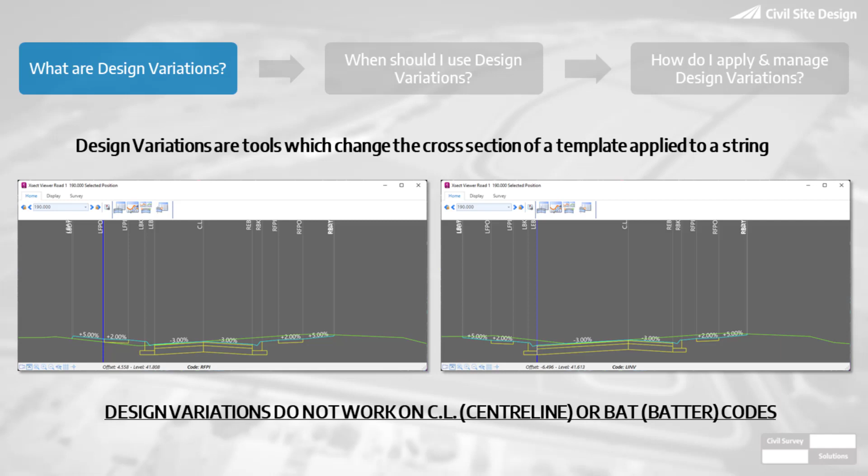Do not use variations to try and control the centerline or the BAT codes on your template. I think it's a fair summary, Todd. Yep, very much so. There's special codes that are not controlled by the variation controls at all. We will mention the design data form will flag where you can do the batter, and the centerline is the vertical grading editor at the end of the day. So that's where you control those particular codes. So we'll be looking at everything other than those two.

Now, really, the question is, when should you use design variations? And look, there's no kind of right or wrong way of answering this. There is a very wrong way when we look at point 2 in here, and we have an answer for that. In fact, there's a webinar which I'll mention shortly. But certainly, there is nothing wrong with applying multiple templates, but it's this element, isn't it? The time consumption for creating and applying. There's multiple ways to achieve the same thing.

And I suppose one of the big ones is the transitions. Transitions between templates are linear. So when you're transitioning between a template, you're basically going from a point to a point. There's no accounting of any curvature that is going on between those 2 points or between those 2 chainages. So changing templates works for some instances, but not for all. If you want to have finesse on control, then variations is the key.

Absolutely. Finesse and control is something we're going to talk about here, but certainly if you're wanting to move a code that happens to match onto a feature, for example an alignment, you're doing some widening, or you need to make some physical changes to really change the shape where you're not putting a code 90 degrees to the template, then variations are going to suit your requirements. The great thing is also they respect the subgrade. Todd, this is something you're going to be covering. Yes, I'll look at that a couple of times in my examples. Fantastic. And adding a code into your template which wasn't there originally does have implications on subgrade, so we're going to be covering that.

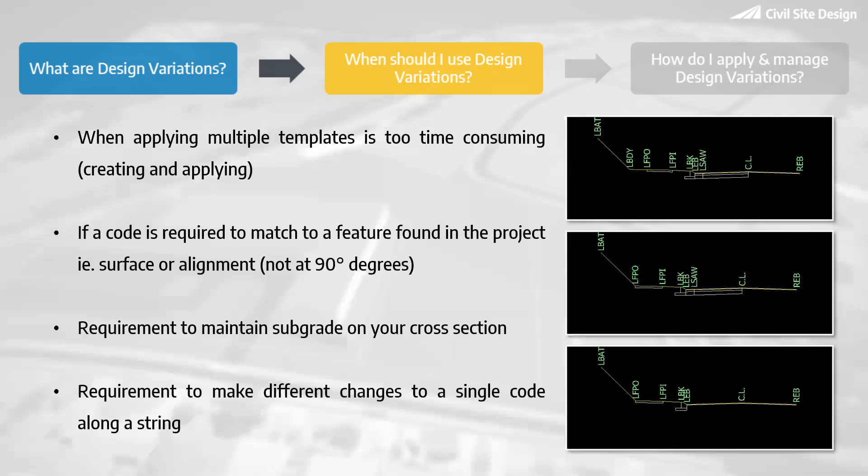Now, the complete polar opposite of this webinar is this webinar. So when should I not use design variations is this webinar. And a lot of the content, Todd, you're going to be doing copy codes, which looks at putting a footpath in at the back of our proposed road or existing road. Yes, Ilett Street, where the parking facility is. That's right, where the parking is. We actually did the parking, which you do not use design variations for.

We used a Civil 3D alignment, and people go ahead and try using match to alignment for that. Completely the wrong method. This webinar is the polar opposite, but it'll complement. It shows you why you would not use variations and templates and actually use independent strings associating with each other and then using Model Builder to maintain the connection. So well worth having a look. It's on the Civil Site Design YouTube channel under the webinar playlist.

And I think I've moved it, so it's actually the second from first one that we've done a year ago. Really? Can you look at the date on that? I can't believe it's a year ago already. We did this one. So yeah, time's flying.

Then the last point is, well, how do I apply and manage design variations? And certainly for those of us that have been using the software for a long time, and Todd, I mean, you've been using this software.

I don't really want to admit that, but yeah. All right. Well, you can come out and talk about it. You're in a safe place. No, I have been using the software for a very long time.

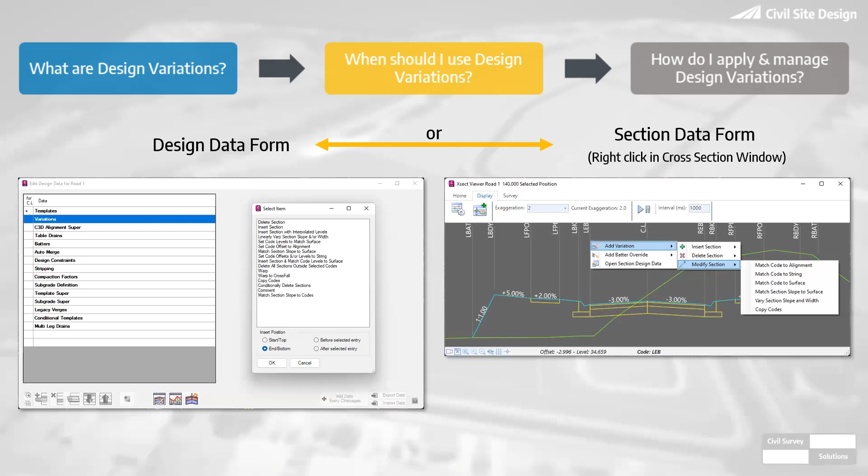Look, we're just plugging some points here about why you might use the design data form, as opposed to, or in addition to, the section data form. And really, the key one is this: the design data form contains every single design variation. Okay, there are a few missing, as we'll see shortly. We've got a little table.

Comments, which I know, Todd, you're a keen advocate. I am. And so am I, but certainly you're a keen advocate. Todd showed me a job yesterday where there were tens and tens of variations in the same string. Probably about 200. 200 variations. And comments were there to indent and categorize them, which was very helpful.

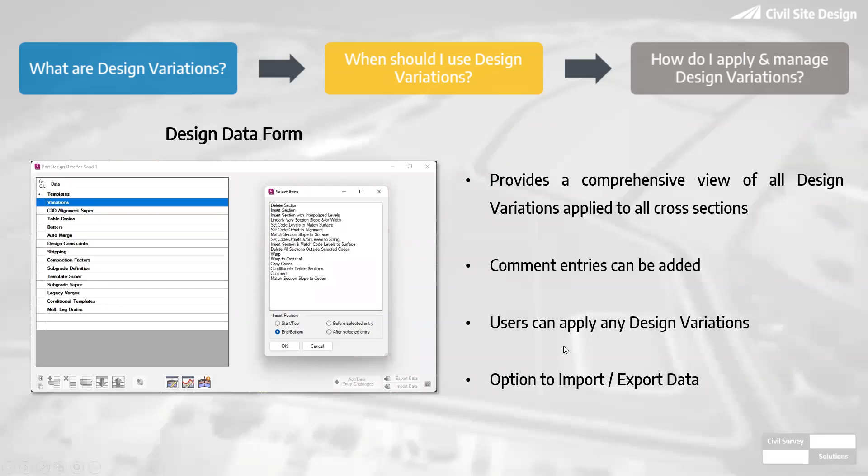Yep. You can apply any design variation through this form, and you've got the option, which you don't have in the section data, to actually export and import. And we'll show you how to use the export and import. It is actually exporting everything in this form, but it's a useful way of showing you different types of variations being applied to one string. So we can go ahead and do something, save it, and then import an alternative version to get the benefit of seeing what the other way around is.

The section data form, which you'll see how to access in a moment, you're probably seeing it through the right click in the cross-section window, provides a view of design variations, templates, and batter overrides, but only at that cross-section that you're looking at. Okay, so this does not give you the complete list, but it does give you a snapshot at that one particular cross-section. It's filtered too, which is one of the really cool advantages. Yeah, it's not everything. It's only what's relevant to this section. Absolutely, which is really nice.

And you'll see as I scroll through the cross-section window with this form open, it'll actually adapt and change this particular chainage up here for me, which is nice. So I get to see what's going on as I'm scrolling through my cross-sections. There are some benefits to using this from a speed perspective, that when you right-click over a code and decide to apply a variation of some sort over that particular code, a lot of the cells auto-populate, including the code and the chainage, which is handy.

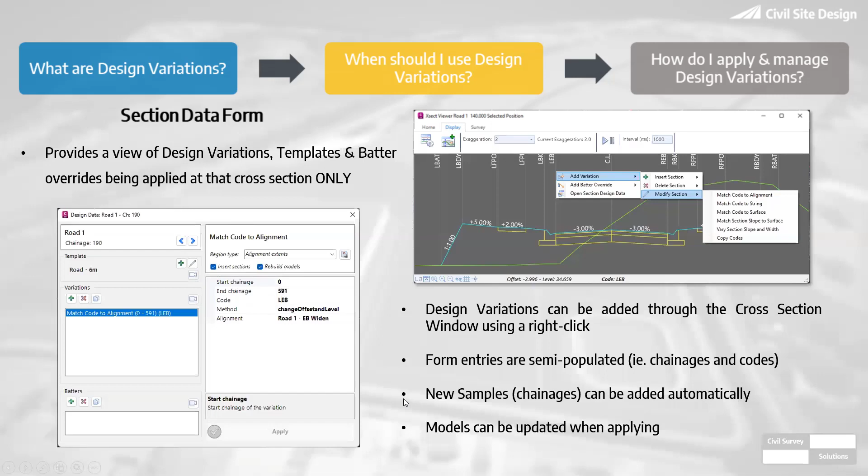New samples, which Todd's going to mention, about how to add extra samples, the trick with adding data entry chainages on the design data form. This will actually go and add these for you. So I could punch in any chainage I want. As long as that box is checked, the extra samples will get added, and models can be updated immediately. So traditionally on the design data form, we have to click on update.

So, a few benefits you'll get to see in action. One of the key ones for me, as I'm beginning to get used to using them, is that you can access both of these tools via what's known as a grip.

So when you select Civil Site Design line work in V22 onwards, I think that's right Todd, never know the exact number, one of the variants, you can hover over a grip and access things like the design data form.

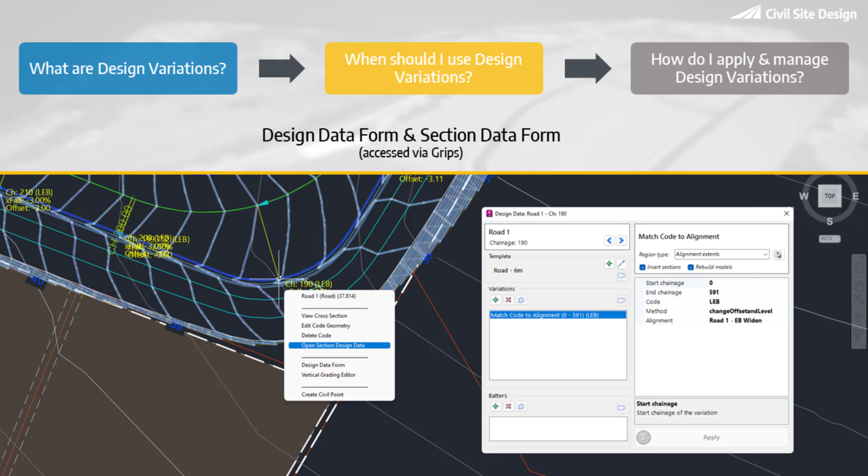Whoa, easy. And you can also access the section data form, which is this form. So I can go in, see what's happening, and apply variations, templates or batter overrides at that cross-section immediately without opening up the VGE, the design data form, or the cross-section window. Although you can open up a cross-section window, which is what we're going to try and do to give you context. So very helpful having the grips.

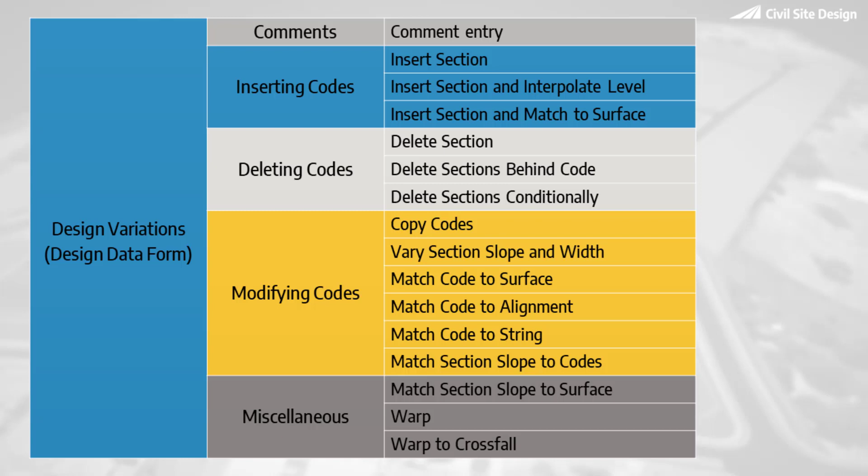The reason why we're showing you this is because there is a slight difference between what the section data form can do and what the design data form can do. The section data, the right click form, does not have these options available. That will change - we're actually discussing putting them in, but the initial instance of creating this technology was that we just add in some key variations that people want, and I think long term they'll all go in, which will be handy.

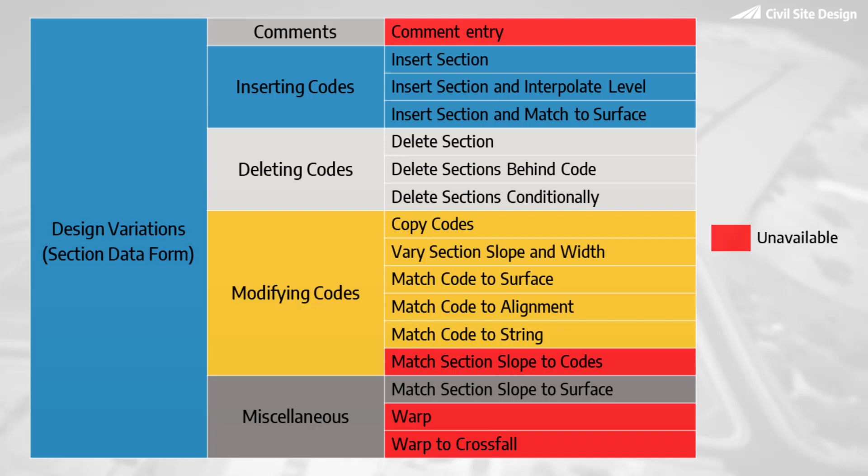There is one other thing. When you use the right click, because it was intended to be sort of new user territory, we renamed them. So what you may find is that there are differences in names and terminology. For example, where we've got match code to surface for the section data form, when we right click, we'll actually see that in the design data form this is set code levels to match surface. So we're giving you the alternate names.

I'd recommend you take a screenshot of this so you get used to it. I think most of them are self-explanatory. In actual fact, in the section data form they were intended to be a lot clearer as to what exactly they did. But for those who've used the software for a long time and want to convert or start using some of the right click or section data, this is where you'll need to have a look first. So without further ado, I'm going to hand over to you, Todd.

So I'm going to let you share your screen. I'm hoping you can just simply go share and override. If not, I'll stop sharing. Fingers crossed I set that up. Let's see if I can. I'm just moving things out of the way so you don't see the screen back itself. Yes, I'm going to stop and share that one.

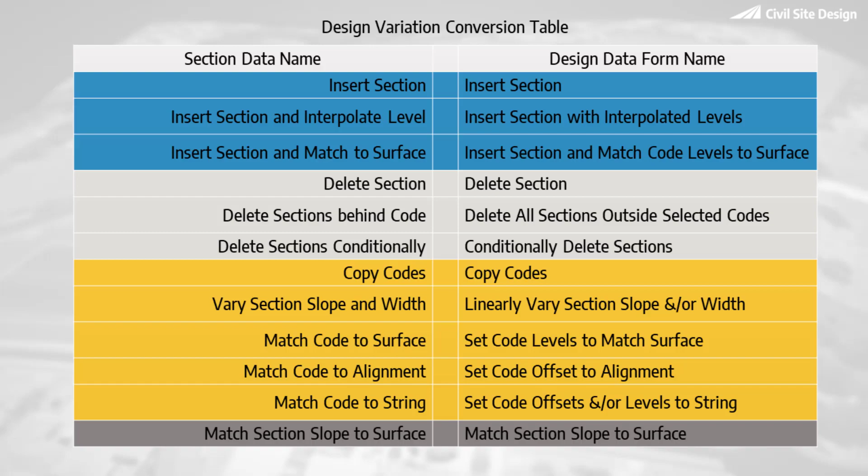Okay, fingers crossed, can everyone see my Civil 3D? With our favourite Mollywalk project? Yes, beautiful. All right, thank you for that fantastic summary. And I can't reiterate that last slide with the table of name changes enough, because it can get messy if you forget the name in one and look at the other. Anyway, ultimate goal, fingers crossed, is that we can get the development team to align the names and then there's no problem with it. But that table is key for the moment.

All right, so I'm going to show you guys the first few - basic insert, delete, and then one I actually like a lot, copy codes, which really is more about merging things together. I must admit I've manufactured this drawing to allow me to do all of these things in one spot, so hopefully I don't have to chop and change drawings. I'm just going to go to different parts of this model and show you some of the things I'm going to have a look at.

As we mentioned, you can certainly launch the design data form, which is what my focus in terms of interface is going to be, from a heap of different locations. So you can launch it directly from here, from the ribbon, and then select the code you want, the string you want to access information from.

You can launch it from within the vertical grading editor. You can launch it from the cross-section window. You can even launch it from the grips, which is actually some of my favorites.

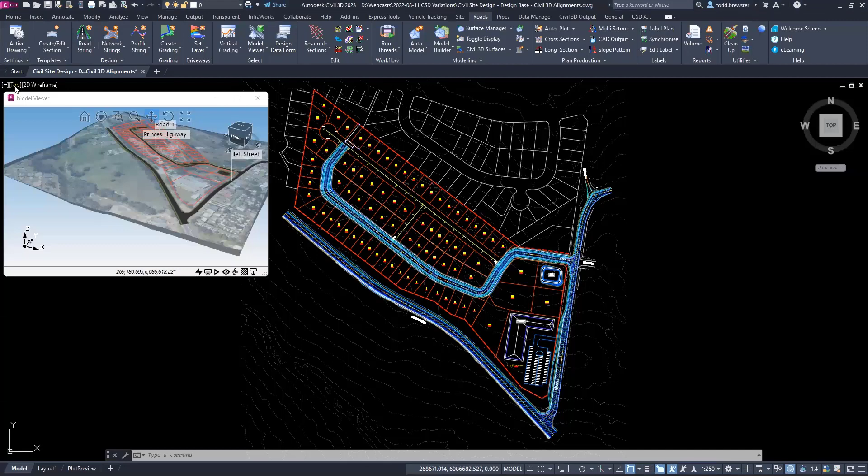So the first one I'm looking at is going to be this. I come in here, I can just simply go straight to grabbing one of the grips. There's the section data, which is the filtered one, coming from the cross-section view, and the design data form's there. So you can launch these things from lots of different places. You can even launch them from the model viewer itself.

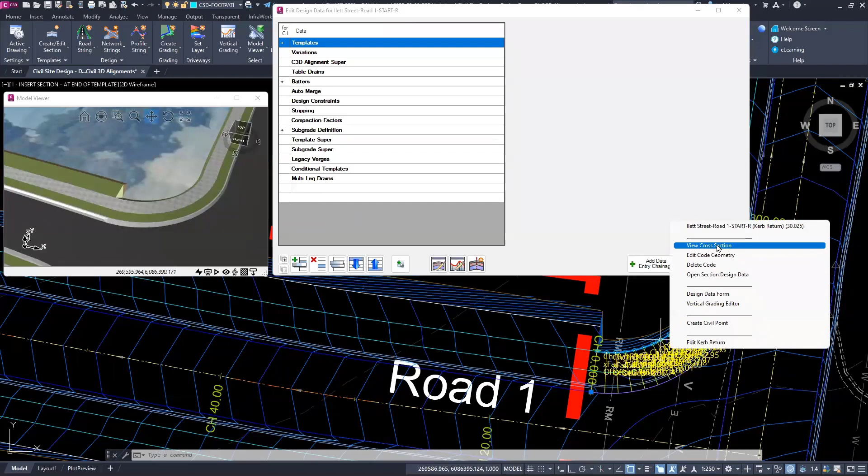So the first thing we're going to look at is this kerb return here at the intersection, and I right-click in here to get a whole heap of different commands, and I can pull up the design data form from there as well. So yeah, lots of ways to access it, and there's probably more that I haven't even mentioned, but they're the main ones. You can also launch cross-section views from the grips, so I'm going to use that a lot in this session. Just to be consistent, that's how I'm going to launch everything.

The first variation I want to look at is insert, but before I get to that, I just want to give you a real quick rundown of what some of these buttons are across the bottom that you may or may not be familiar with or used to using.

Number one, these two here on the left actually are expanding and contracting all of the entries. So as you add information to the different heading groups here, you can expand them. You can click on the pluses to do individuals, but you can use these to just globally expand everything.

These ones here are all about whichever entry you're looking at: adding new ones, deleting currently selected ones, copying them, reordering them up and down.

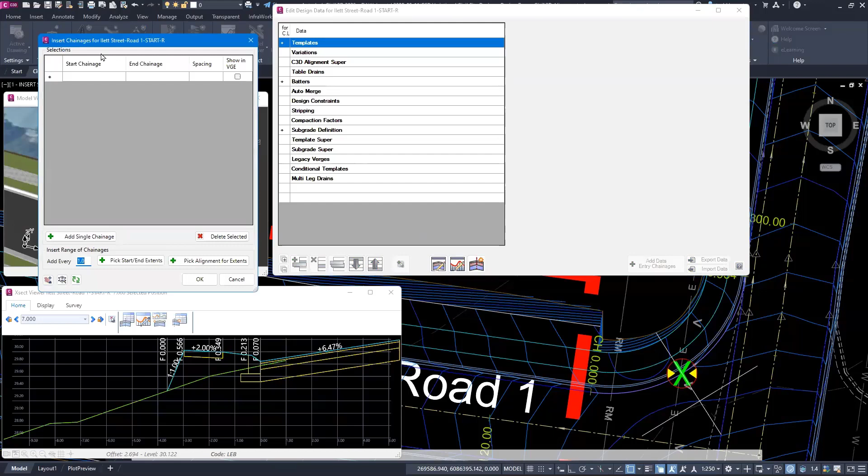This one is, to be honest, the best way to insert sections when you need them, which if you launch this one, will launch up into your selected sections list and you can start adding extra things in that you might want to use. This one is about showing cross sections.

This one is opening up the VGE. This one is the template editor. There are a few others that will appear here depending on what action you're doing, and then there'll be one that appears here, if I remember correctly, that's the one to show you the extent, cross-section, beginning and end stuff. But as they happen, I'll launch them up and show you guys what they do.

This one here, add extra data entry chainages, is probably one of the big mysteries in this form. I will show you how this works in one of my later examples, one of the deletes. I'm going to use this, but essentially it's a two-step process. Whenever you add an entry in the variations, you have an option to create a section at the beginning and end chainages that you enter. And this is how you actually add them to the data set. So it's kind of like you got to set it up, hit the button to essentially update it.

Import export is to take a snapshot of all of this information, export it out to file, load it back up again. And that's about it for those things.

Let's jump into it. So the first one is all about insert. Insert is your ability to add a code to your cross-section without actually manipulating the template itself, but it has the same effect as inserting a section inside your template. So the problem I've got here is this kerb return, which transitions from Road 1 around into Ilett Street here.

It uses the auto entry for me to generate the template across the cross section, which gives me my nice curve and my nature strip and my footpath. But Road 1 has a boundary code in it, whereas Ilett Street doesn't. So the software doesn't transition those codes around for me. So I'm going to use the insert command, add it in, so that I can actually get the thing to transition from one to the other.

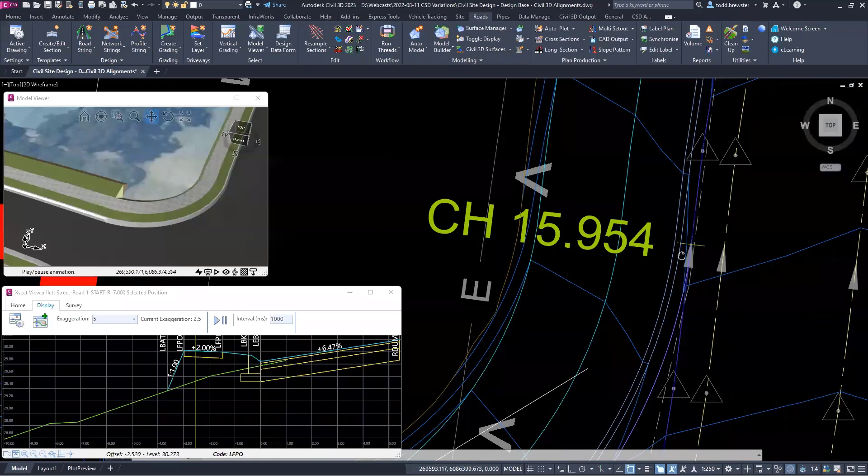But for this example here, I want to get to the end of my alignment, so if I've got my snaps on, it should snap me to the end. It's beautiful. I'll zoom in a bit so you can see what happens.

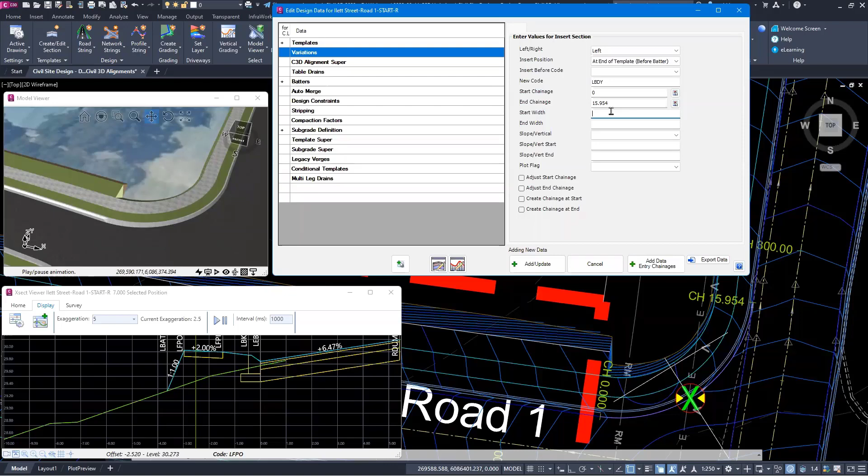So now I need to give it a width. The nice thing we give you here is that whilst it's an insert command, it's actually kind of like the linear vary command, which Jonathan will show you later on. It gives me the ability to transition the shape or section I'm putting in from the start to the end. So I can say the start width of this thing is going to be 1.9 meters, which will match my width at my side road here at road 1. But at the end, I want it to be 0 - so essentially I want it to transition around here, just in a linear fashion.

Bear that in mind. Then I need to tell it what type of vertical control I'm after, so I'm going to go for a slope. And my slope in my template is 5%.

Do I want to see the thing when I plot? Yes, I do. These ones here are the create stuff, discussed later. These two here, you'll see these in a lot of the variations, if not all of them. And they are all about when a variation at, say, the end of one and the start of the next, if you maybe start and end something at the same point, if the variation actually stacks up and does a double entry against the code you're manipulating. Linear vary is a classic if you're using the incremental option. Adjust allows you to essentially tell the software to ignore the variation at the beginning and the end so that you don't get the double up. So let me see if I can illustrate.

The way the auto template works, it actually is auto inserting things. And if I don't adjust the start, I'm going to get a double entry for that 1.9 meter, and this is actually going to shoot right out. So you'll see in a sec when I do it. See in the drawing down here, the white line shot out. If I refresh the model, look at the cross-section view, the model viewer view, you'll see that the model here at the beginning goes absolutely pear-shaped. And that's because there's a double entry at the 0 point.

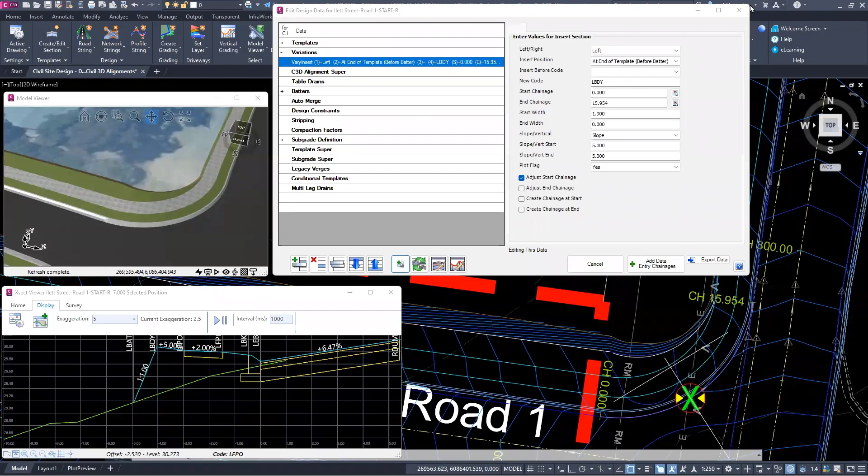If I want to insert at a midpoint in a template or inside a template, then I'm going to do this in a different location on a different model. So I'm going to do this on this model over here, which is Princess Highway. So I better zoom this thing out. Somewhere around here will do. So what I'm going to do for this one is I'm going to insert a section in between. I can get this up. Here we go. Cross section. So I want to insert a section in between here.

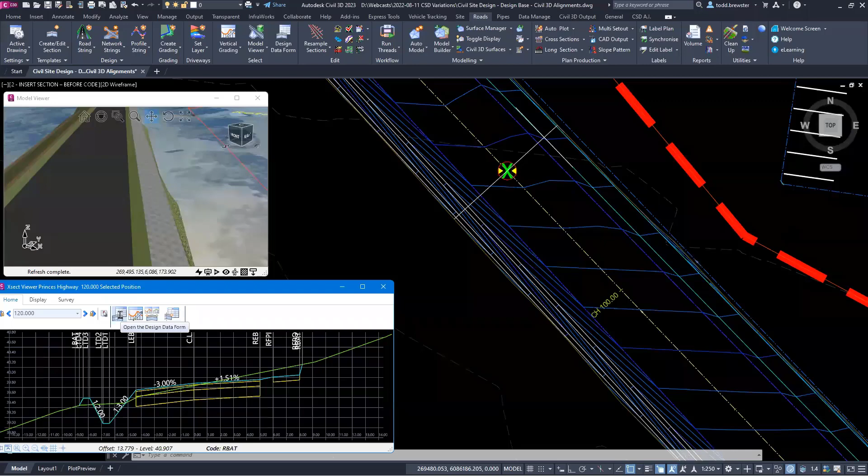I want to put a shoulder piece in. I could very legitimately do it in my template, but I just want to show you what happens in here. I also can launch the data view, sorry, the data form from here. So it's another way to get it up. This variation here, there are some variations already in here, and I have used the comment entry.

Now, Jonathan did make the comment, pun intended, that I'm a massive advocate for the comments, and I have learnt this in my professional career, that if you don't put all the comments in your modeling, because you know what you're doing at the time you're doing it. But when you come back to look at your project in perhaps 4 or 5 months time, when it's actually in construction and you've got to work out what's happened, you're never going to remember. So the comments are an invaluable tool for you to remind yourself when you look back at your data, or if maybe a colleague needs to look at your data, to actually understand what it is you've done with the variations in particular.

So the comment field is just literally this one here, and it is just a text entry. So in here, I've already written in what I wanted. And then it just reminds me, it's not something that the software will use in any way, shape, or form other than just a note in the list.

Just a quick point on that, Todd. Yes. For those of you that have used our tech support or help desk, it's also really helpful for us, because when we receive your data, and we do receive 50 different variations, and you're saying, oh, I've got a problem with one of them, just bear in mind that the comments aren't just necessarily for you, they benefit us as well, because they're a really helpful marker. So that's all I wanted to say. Very good point, Jonathan.

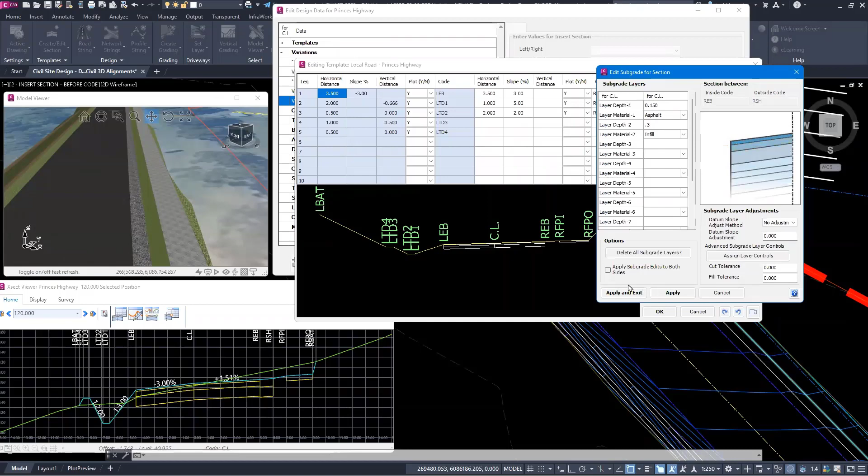If I make a change to one of these things, maybe I'll make this a bit deeper for some reason. If I apply that out, the cross-section adjusted. So it's live to each other. It doesn't matter which order you do it in, but that's why the subgrade worked for my example here. All right, so that is insert before a code.

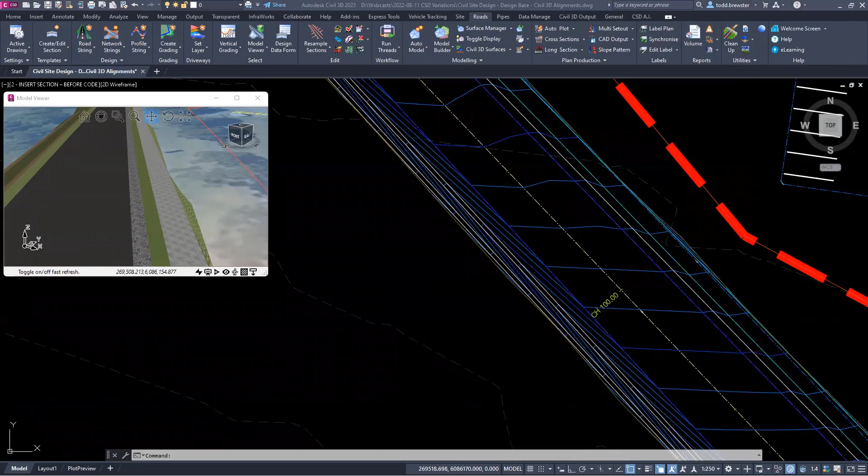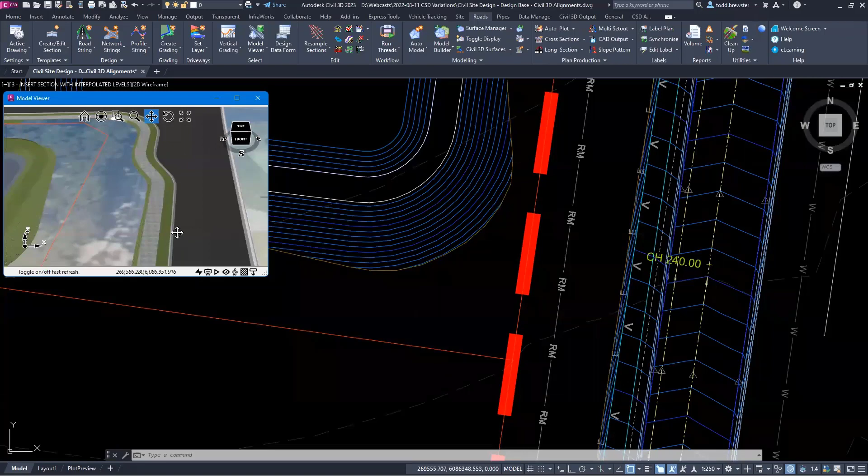So the next one I want to show you is insert with what we call interpolated levels. So I'll jump to another part of my model for this. So this time I'm going to have a look at Ilett Street here. In my model view, we're looking at, where are we looking at? The pond, over here, somewhere around here, this will do. And I better get a cross section up. Cross section and data form. Okay, so again, there's already some variations sitting in here that I have done previously just to control the widths of this cross section.

But the first cross section I want to put in is actually to control what happens with the pavement on the right hand side. So the brief I've been given, which is different to the brief Jonathan's been given for the same road that he's going to show you later, is that the right hand side of this road, the curb needs to be replaced. So the current curb is barrier curb, but we need to put in some rollover. But I don't really want to rebuild the entire pavement stretch. I just want to rebuild a bit of the pavement in front so that I can get the curb machine in to build the curb.

The rest of it, I potentially just want to resheet or just add a new veneer of wearing course over the top. So the insert section with interpolated levels is a really nice way to essentially add in a code into your cross section that is effectively just for subgrade changes, because it won't change the crossfall between the center line and the right edge of bitumen. It just adds it in and uses the same crossfall for both sections. But it gives me a code to allow me to apply different code pairs for different subgrade conditions, which is exactly what I want to do in this particular case.

So we go in, add a new entry. This time we are looking for insert section with interpolated levels. And the range I want to do this thing for, again, is the whole length. So I'm just going to use 0 to 1,000. Same as the other one where you have the idea of before and after. Not quite, sorry, this one's after code, whereas the other one was at the end of template, but the same concept. It's direction specific from the center line working out. So in my case here, I want to go before, and I'm going to do this on the right. So I want to do this before the right edge of bitumen. And the new code I want to put in is a code called RSAW.

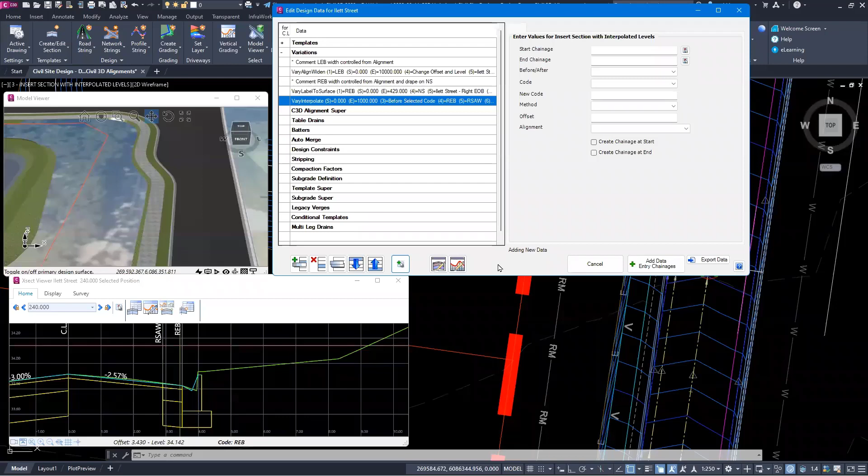Click on apply. And there's my new saw cut code. If I refresh my model, which is what this button is, every time you make a change and you need to update models, you can use this one to refresh everything. And the software will rebuild the total model.

And if model viewer is open, regenerate the model viewer. And you'll see that the pavement makeup in the model view up here has actually changed color because I've got it set to go up for a different color. And in my section here, I've got full depth pavement for this small section, and then I've only got a different pavement here. Exact same technique as the template subgrade that I showed you on the Princess Highway one, where I actually already had the code pairs of the centerline RSAW to REB sitting in the section to do my pavement switch. Exactly the same.

So that's insert with interpolated levels. Yes. Whilst you're on that one, we just had a quick question come in about inserting after the center line. Can you just show the example, just showing the alternatives, what happens with the center line method? So this was fixed distance. So instead of relative to code, go fixed distance and then we just want to show what happens with this, how it adjusts. Okay, so if I go 1 meter, add that. So it's 1 meter from the center line to here.

Yep. If I go -1, nothing. Good. It does take it out. Beautiful. Okay, so I was wrong on my statement there, and you can take that out in the webcast recording. We'll do. I'll get it out in post editing. Great. Because I think previously it used to actually treat the negatives and positives as left and right. So good to see that it ignores that. Yes. Beautiful.

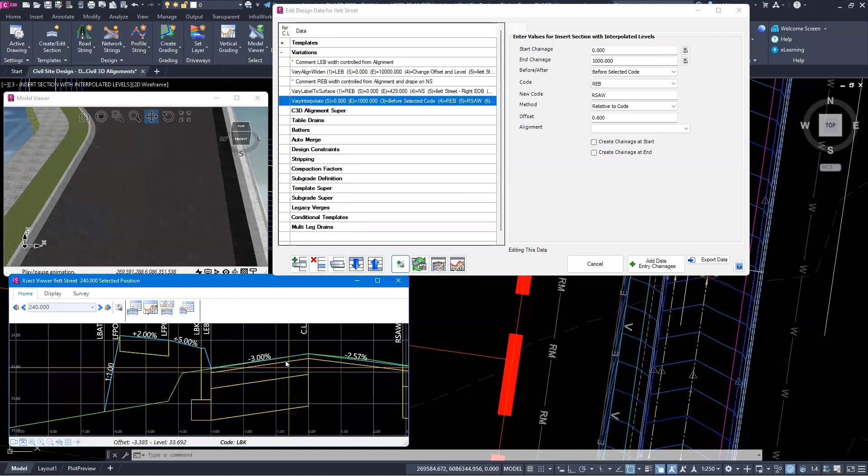Next one, I think that's enough for that one because that's pretty straightforward. Great for reconstruction projects, as I said, used to use it all the time. Next one I want to do is actually a very similar technique in terms of inserting a code into a cross section, but in this case here, it's actually going to be on the other side. I'm going to do it on the left. Hang on, let me just reposition. What chainage am I at? About 320. All right. So let's go and look at 320. All right, model-wise, I'm just up here just for clarity.

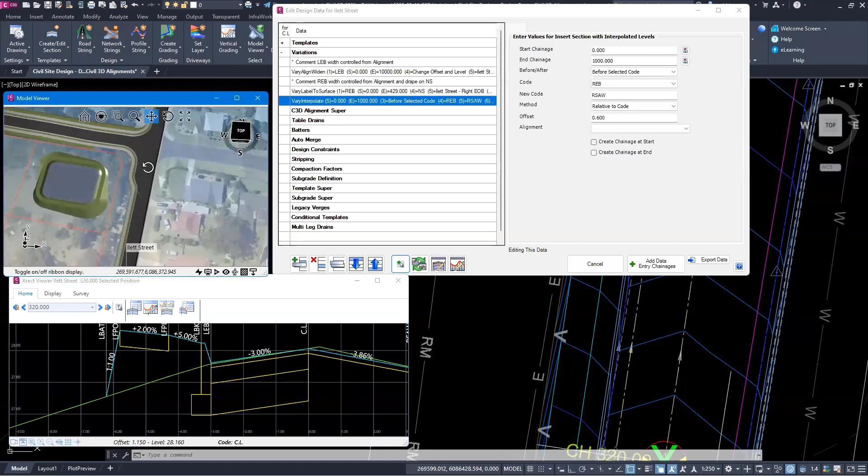Same concept. The left side of this road is brand new curb and channel. There is no existing curb and channel to replace. It's the same deal with the pavement in here. The bulk of it's pretty good. Someone's made that assessment. So this time I want to insert a new code into my section, but I actually want to drape the code onto my surface model in the first place. So this one would be using, I get the command list up, the other insert, because there are 3 of them. This is insert a section and match the levels to a surface.

So this one is essentially combining 2 other variations. So this is the same as just doing a general insert and then using match to surface variation. Kind of rolls the 2 things together. So if that's the type of thing you're trying to achieve, this is the variation you would use. So same as in the last ones, I'm just going to go a full range.

When it is any variation that is alignment dependent in terms of offset, it's actually the extent of the alignment that controls it. So if my alignment doesn't exist at chainage 1000, if my road was that long, it would just stop the moment the alignment that controls the variation stops. So the range is kind of irrelevant because the alignment doesn't exist, variation doesn't happen. So you can actually use the existence of the alignment to control when the variation actually kicks into your models. If that makes sense, I hope.

Okay, so this one's the left side. So amazingly, it's going to be called LSAW. Same idea of picking a code, but this time, and this is the one I wanted to stress about, you're inserting after a code.

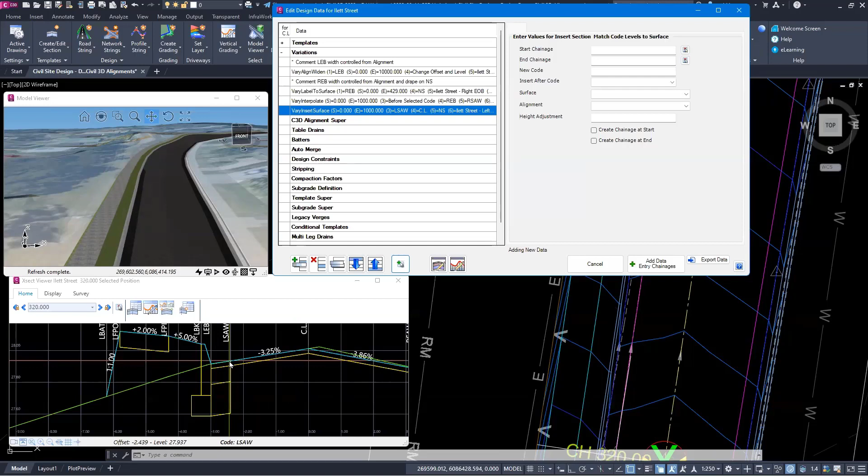If I refresh my model, then cross-section up here does the same as what happens on the right, in that there is a new section of pavement. So essentially the dark stuff is brand new pavement. The lighter stuff is my resheet stuff. The advantage of this is the offset control here is controlled by an alignment as opposed to a fixed value in some form. So this is kind of the full control version.

To be clear though, I'm not going to go to the effort of this because I think this is something that we've either done before or Jonathan's going to do in his bit with string control. But this cross section here is coming from the template. So this 3% is coming out of my template settings from my template crossfall. The crossfall here, because it is between a matched surface and this is matched on the surface, is essentially the existing surface crossfall. So if I was doing this properly, I probably would go to the effort of actually modeling this thing with some sort of range and string control to make a change to what happens to that.

Todd? Yes. I know I was actually going to cover this, but to be fair, this is the prime example of using match section slope to codes. So I'm happy if you actually want to do this particular match one down the bottom of the list. The very bottom. Yeah. I think this is probably the best example of showing you how this comes into play. So I'm happy if you want to take it. I'm happy to do it.

So if I want to essentially take this crossfall and apply it to this section, then the entry I need to use is match section slope to codes. And it's literally the same concept. Find your range. So I'm just going to go the whole length. I'm going to apply this to my LEB code. I'm going to do the calculation between the center line and the LSAW code. So in other words, here through to here.

I should stress at this point, you can't go the other way. So you can't take the slope in the reverse, and you can't take codes that are from the other side of the template on the wrong side either. So no, you need to use the full string controls for that. It's always going from the center line outwards, and that's the direction of your code picking. Yep. Thank you. Optional alignment.

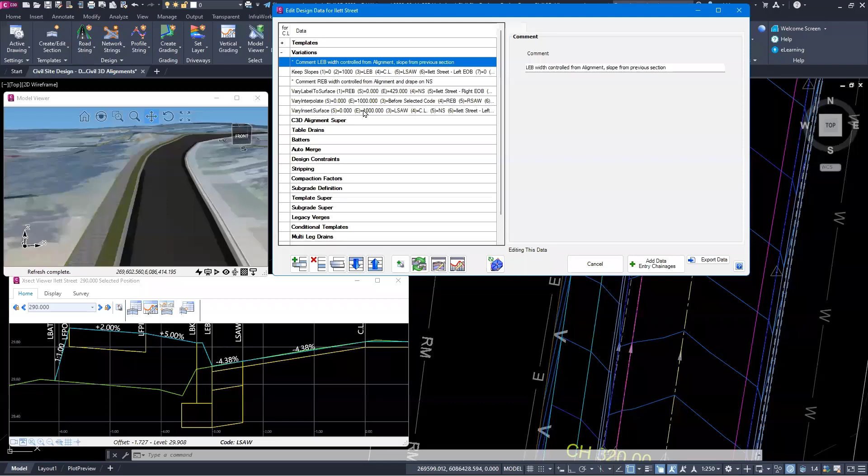Todd, just a quick one. Yes. I think it was a slip of the tongue, but you did say very briefly that you could disable a variation, and someone has picked that up on the Q&A. So I should stress there is no disabling of a variation. When did I say that? You did say it in the recording, but Cam has picked this up and he's gone, did you say I've been disabling variations? Yes, you are right.

There is a way to disable a variation. It's not a nice way, but there is a way, which is here. You just change the range. You just say this thing starts at 1,000,000 and ends at 1,000,001. And it essentially goes away. But then you've got to reset the chainage values. So you've sort of semi disabled it, yes.

Correct. There's a few people now flagging it up, and Steve's going, set the chainages to 0. So yes, that is change the chainage range to something extreme, something 0, something negative, something that's outside the alignment if it's an alignment based one, or outside the range of where you're working. But yeah, it probably was a slip of the tongue. It's not disabled in terms of I turned a variation off. That would be nice, but it doesn't exist. I was more just saying that you can adjust the chainage range and that effectively disables it.

There is only one variation that you can disable temporarily, and that is your string control. And Jonathan will show you that with one of the options. And it's not really disable. It's more like just ignore. Ignore what I'm telling it to do. Yeah, pretty much. Thank you, Todd. Apologies if I got everyone excited about something that hasn't been put into the software.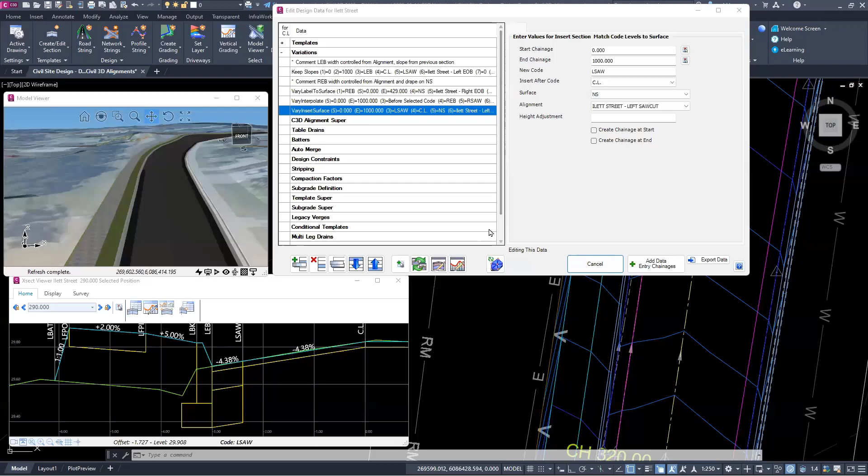All right, so that's two for one. Next one I want to show you is delete section. So let's jump out of these and we'll go up to my delete section one. So I'm going to do this on whole new road number 1. Very original name. So where am I? I'm near lot 3. Lot 3 here. Okay.

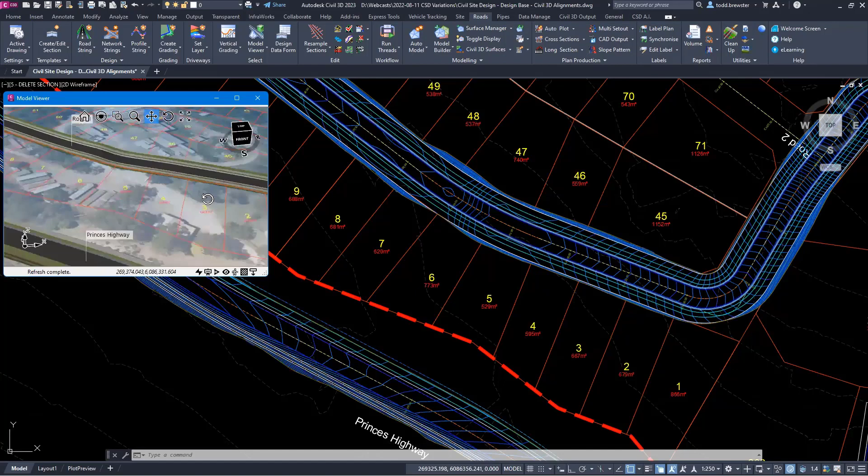So in this particular variation, if I come in here and go to the data form, okay, didn't get the data form, didn't get close enough to the center line. I want to essentially remove the nature strip. So I want to kill off the green. I want to put the footpath behind. I want to go American style and have a sidewalk rather than a footpath. So I'm going to use my good old trusty delete section. Delete section allows me to remove a section for a range.

So this is what I'm going to show. Timestamp wise, we've got to remember to flag this one as 2 things, Jonathan. I'm going to show how the add data entry chainages works. So whenever you put in a chainage value in here, if it doesn't exist, the software will go to the nearest sampled section, next nearest sampled section.

Except when you do what I'm about to do now. So if I'm going to go, I want to go from 205, which is not a sampled section in this road, and I want to end my variation at 255. So I want to do 50 meters of footpath removal, and I want to do it to my LFPI.

Effectively, that's the actual code that defines the green. But if I nominate that I want to create the chainage at the start and the end, then I apply the variation. So I hit on the add update, and then I hit on the add data entry chainage, and then any entries that are coming from a variation that has those things ticked is now part of my selection set from my sampling. So then if I update my model...

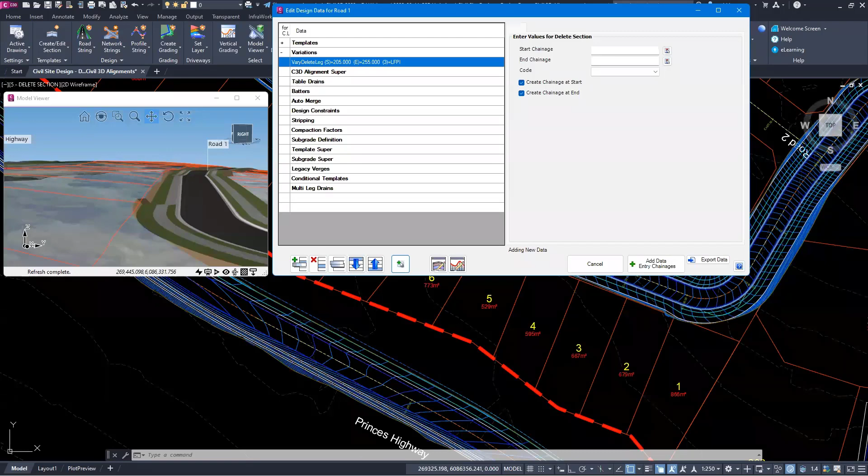You'll see that the footpath kicks away. And if I look at a cross section in the same spot, so if I pull up my cross sections, if I go back a section, see how now 205 is in the sections, and if I go forward, 255 is in the sections. Because I use these, you can't just tick them alone. You've got to make sure you click on this button to make sure that it reads those sections.

So it's kind of a 2-step process. Unfortunately, it is not a graphical pick. You can't use this to pick a graphical location and then enter that value. If you know the number, type it in. If you want to do the graphical pick concept, then you've got to use the selected sections control here, where you can go and pick a chainage range or a specific chainage that you want to add to your sampled list. But they're kind of all the tools in the box for adding extra sampling in.

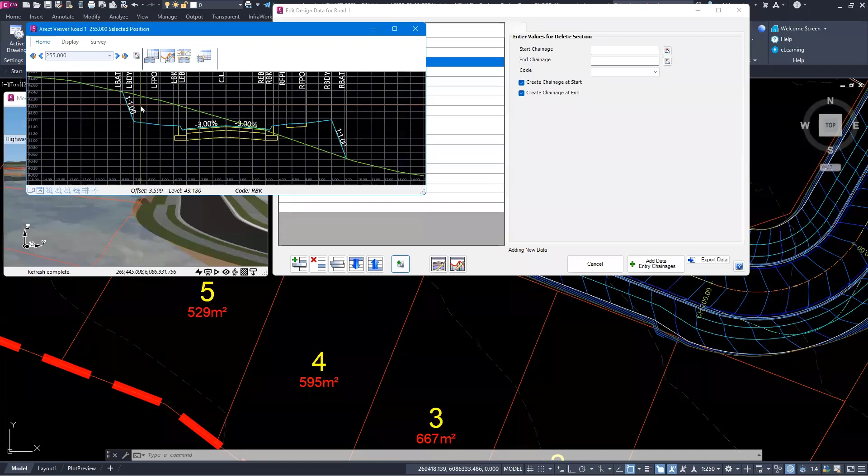The other thing you'll notice in here, the subgrade's disappeared. So there's no footpath subgrade. So if I go beyond 255 footpath there, that's because the footpath definition is LFPI to LFPO. It doesn't exist anymore. So just to round out that discussion on subgrade, and I know I'm running short, Jonathan, on time, but I really want to show this one because it kind of rounds out that discussion we had. So we are in local road 6, it's actually on the right road.

I simply come in here and I go set by codes, and I just type in the codes I want. LBK to LFPO, which is the new codes in the section here. So LBK, LFPO. Add them in.

Just a quick note, I want to flag this because you may already do it, Todd, my apologies, but if you do want to do something between the center line to the LEB. Yeah, I did talk about this earlier. Sorry, you did. I was answering somebody else's question at the time, probably. So yeah, that's my excuse. C.L. Thank you. Cheers, Todd.

It's very much, I'll reiterate, very much verbatim what is shown on the screen in the template editor. It is C.L. is what we call the centerline code when it comes to subgrade definition. So here you go, 100 mils of concrete. If I did actually want to do this on both sides, if I had potential for doing this on the other side, I tick this and the software invents the code pair opposite, so the L's and the R's. I don't care because I don't need it in this one, but that's what you would do if you were being universal, if you knew you were going to do changes on the right side.

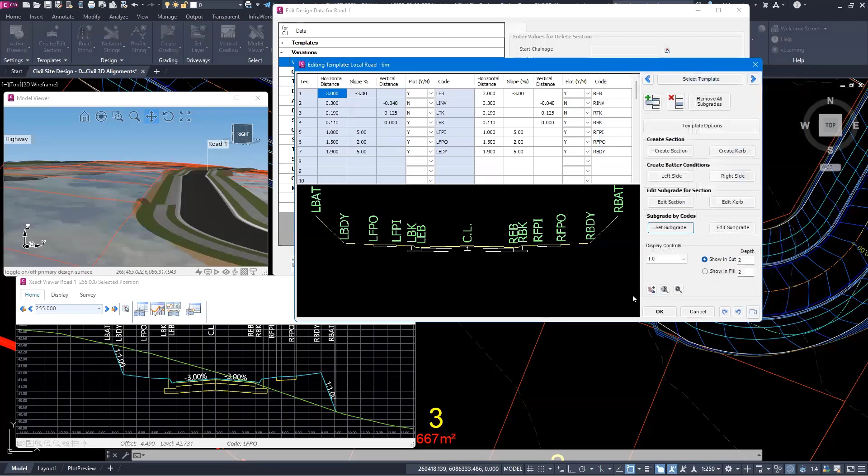Hit apply, click OK. Cross-section now suddenly updates to show me my subgrade. So that's the opposite of what I did before, where I had the code pairs already existing. When they don't exist, I can still add them in afterwards. So it doesn't matter when you do it.

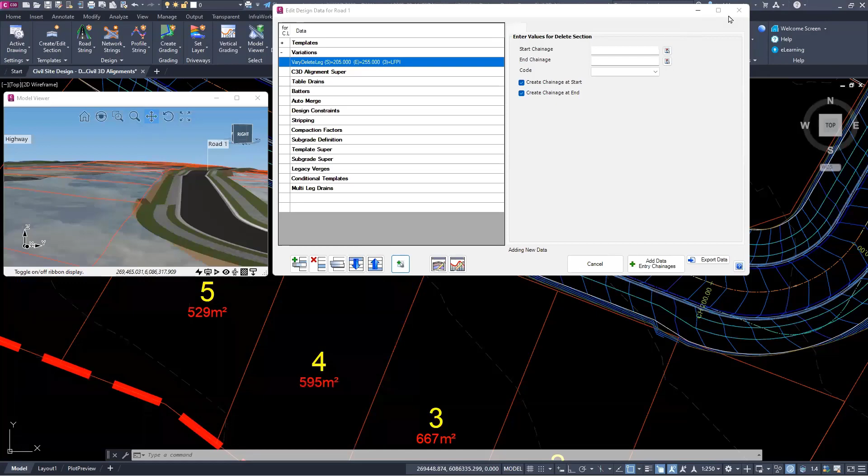All right, next one, delete all. Okay, so this one is the same idea as delete section. So delete section, if you want to delete multiple pieces of a cross section, you would have to copy the entry, clone it, change the code. If you want to just delete everything outside certain codes...

Where's the example I'm going to do for this one? I'm going to do this across Buckland Street. So this actually makes a fair bit of sense. So let me just explain how you would do it if you're using standard delete code.

So if I'm looking at this part of the world, my kerb and channel is shooting across, and I don't want it going across. So I would need to run delete to get rid of the invert, delete to get rid of the top, delete to get rid of the back. So it's 3 deletes. So there is a command in the software in terms of the variations where I can actually use a...

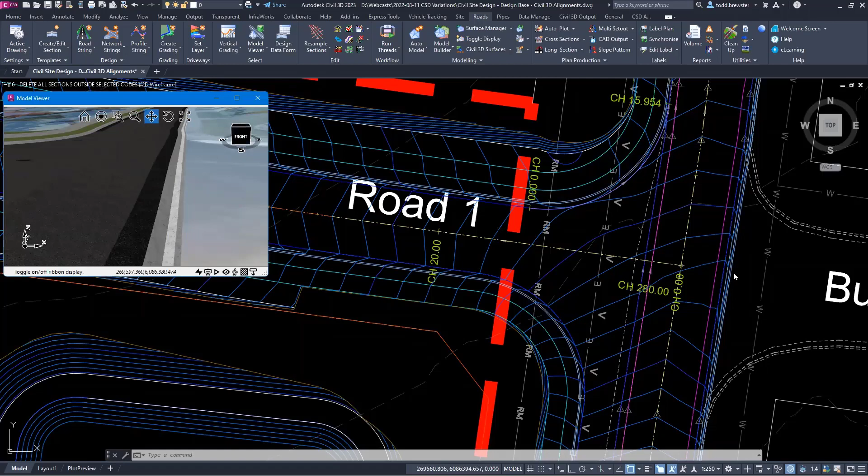The other thing I'm going to show you here, I must admit I did add some extra sampling. I increased the sampling range across here, and I did make sure there was some extra sampling really tight to each other so that the variation I apply occurs over a really short transition.

So I did use the add extra sections command before I even made this model, knowing in advance, but you can always fix it afterwards, because when you apply variation, the software will do the transition from adding or subtracting to the next section along. So if that section's 10 meters down the road, it'll actually happen a long way away. So if you want it to happen real quick, then you potentially add in 2 sample points that are only maybe 100 mils apart, and then that transition, in terms of the strings running laterally along your string, happens in a real short distance. So you'll see it here in a sec.

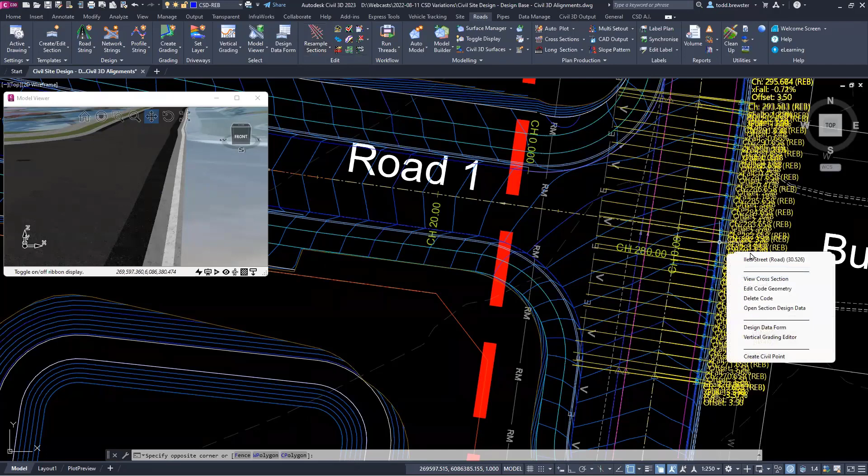Last thing, bring up a section. So if I bring up a section here and data form. Okay, so instead of running delete section 3 times, you actually use the delete all sections outside of code.

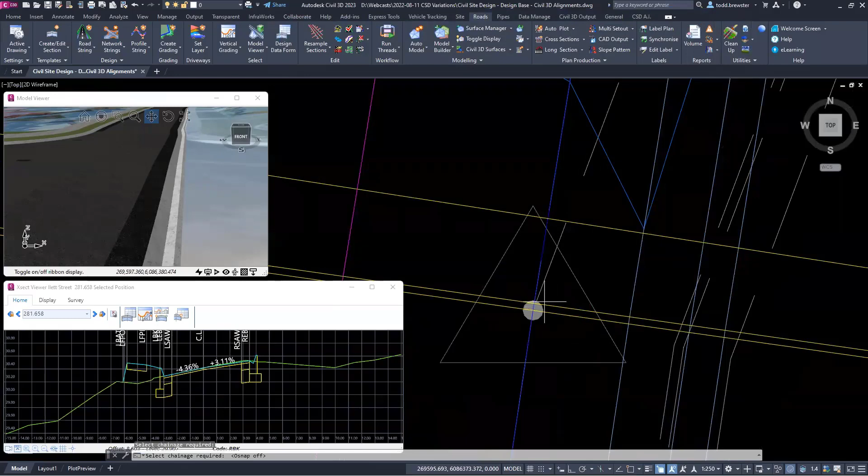This one, same deal, you can specify a range. So I'm going to actually pick a range. I know I want to go from, not that, the snaps were on when I did that. Let me turn my snaps off. I want to go from there, so essentially it's that point right there. And I want to end this at that one, so that the transition back happens in that little short distance.

Now, this gives you the ability to do it on both sides of your cross section. So if you don't want to delete anything at all on one side, you can leave it blank, or you can actually pick the batter entry, which doesn't do anything - it's not a code you can manipulate. I don't want to change anything on the left, so I leave it blank. But on the right, I want to trim everything beyond the right edge of bitumen out, so all of my pieces of my curb, I just want it to go away.

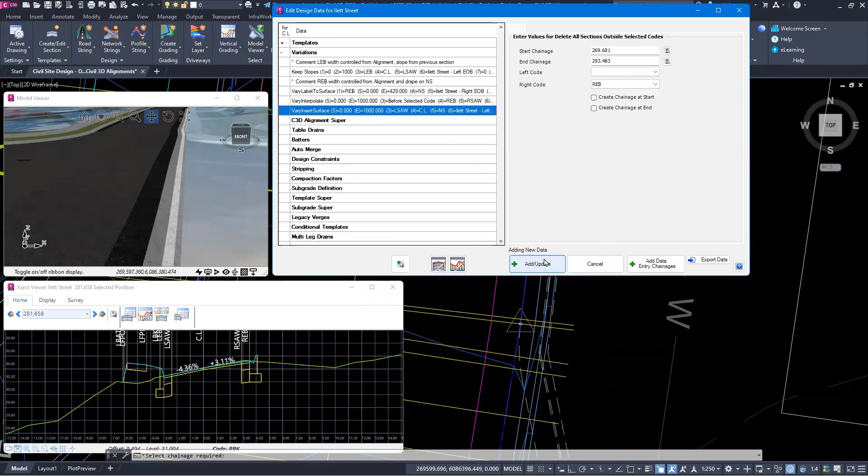So I click on apply, and all those strings disappear in the model, and in the cross section, they've all gone. So when you want to delete multiple things in sequence, delete outside is the way to do it. Refresh the model, and in the 3D model there, you'll see that the curb and channel disappears. So that's delete section and delete all sections - kind of the same thing, one's just a mass version of the other.

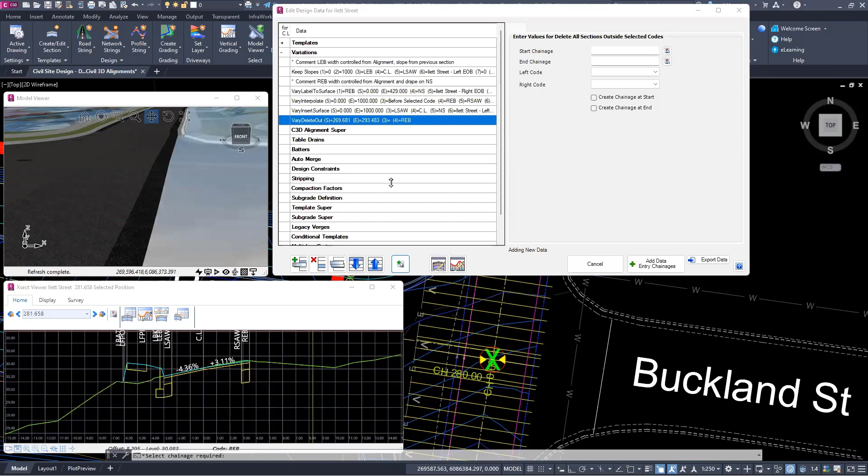Okay, next one is conditional delete. So this is kind of a bit more fancy. This allows you to delete based on conditions in your cross-section model. So best shown by an illustration - I'm looking at Princes Highway, and I have applied some super elevation to it.

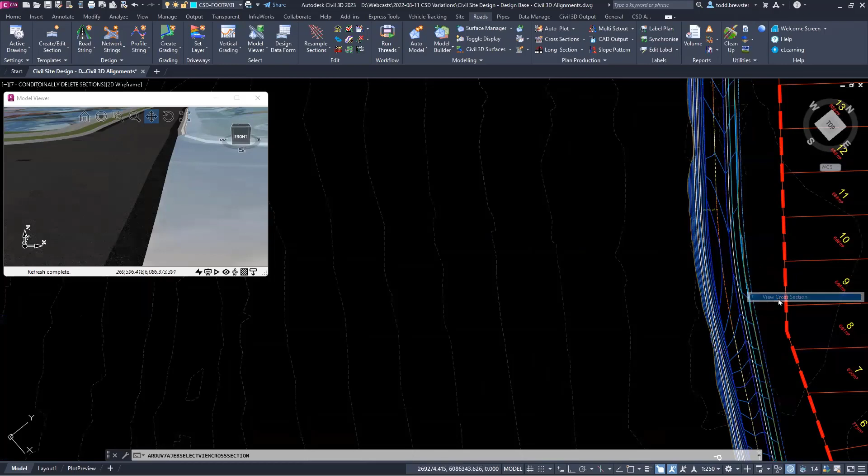So if I bring up a cross-section, and on the left side of this cross section, I have actually built into the template, so it happens all the way along, a table drain. So it's got one leg that comes down, a leg that creates the bottom, a third leg that creates going back up, fourth leg that creates a bench, and then a batter.

Now that's great because that happens if I'm in full cut, does what I want, cuts it all off. But when I'm in fill, which is right in the height of the super elevation, I don't actually want any of this to happen at all. So there's lots of ways you could model this. You could go to the extent of running an intelligence section where you make it programmatic, but conditional delete actually allows me to remove pieces of my section based on conditions of codes.

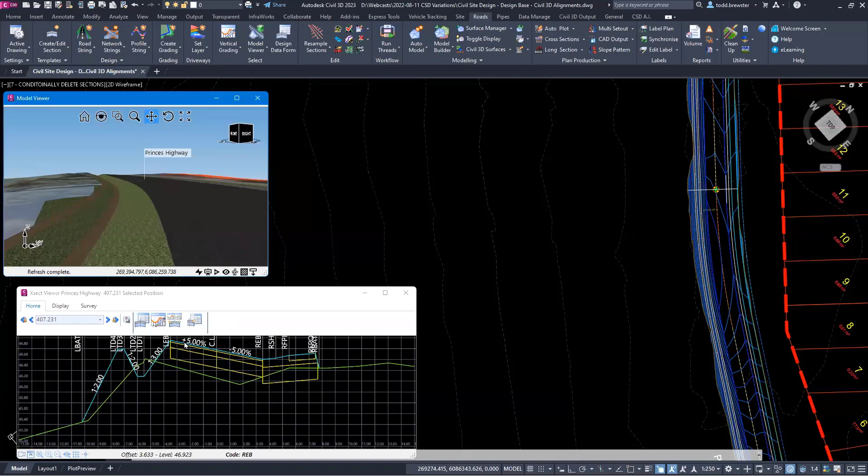The best way, as I said, is to show you this by example. So the first condition I want to try, and I've got to remember to find - there it is, conditional delete.

Same arrangement, you pick your range. I'm going to go 0 to 1,000 for the whole job. So you've got to pick this idea of a trigger code, and it has to exist. Our help system documents all of these variations, so I'd strongly encourage you, if you need to read up on how these things work and what all the entries do, that's your port of call.

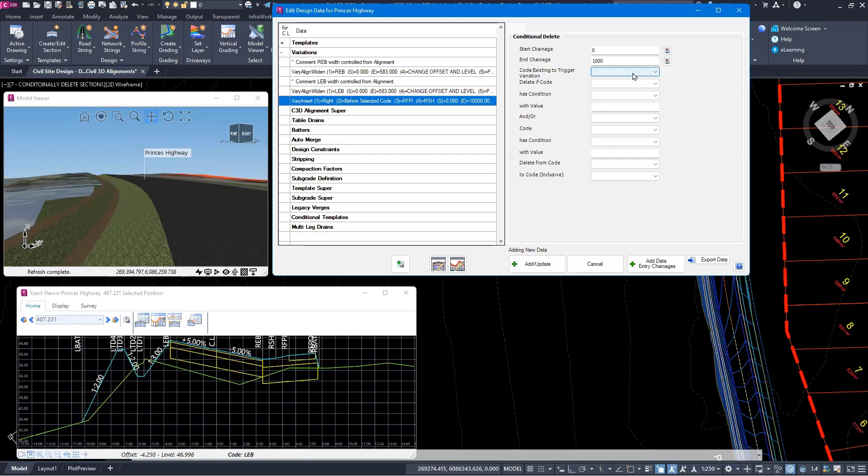The help system states that the trigger code must exist on the cross section for the conditional delete to apply. It must be outside the range of things being deleted, and it's strongly recommended to be basically the last code before the batter, which is what I'm going to use here — in this case, my LTD4.

I'm going to say if my edge of bitumen — so left edge of bitumen here — has the condition of fill greater than 0.33, which I calculated as the depth of my pavement, I want to remove pieces. Now, you can actually have up to 2 conditions, and you can control how those conditions are applied.

You can either leave it blank, meaning no second control, or you can say 'and', which is logic meaning both conditions must be met for the delete to occur, or 'or', meaning either condition can be met and the delete will occur. If you don't have a second condition, you don't need to fill it in, but you can have 2 sets of rules if you want. These are the rules for the second code, so I don't need to worry about those.

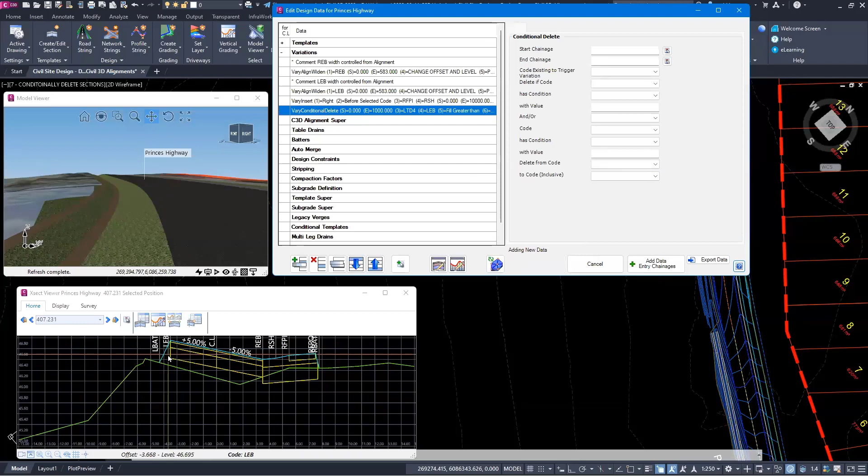Delete code: the first part I want to kill is actually my entire table drain. I want to kill all the way out to the LTD4. I add that in, and my batter takes over, and the table drain just completely disappears.

If I update my model — you'll see up here, let me zoom out a bit so you can see what happens — in the cross section here it's gone, and in the model it's gone.

Now that's great, it's given me a few patches where it's disappeared, but not so good when I get to, say, a section like this, where I may want to have — where's a good one, should have written down the chainage — perhaps this one here, I actually want the table drain to kick in, but I don't want the bench to happen.

So what I actually do is put in a second version of it. It goes 0 to 1,000, and this time the trigger is still my LTD4. Delete if LTD4 — in other words, if this code here is in fill at all, so from 0.

I only want to kill off the last 2 pieces, so I want to get rid of the bench — so I get rid of 3 and 4, basically taking out this section and this section. In other words, the batter here, 1 and 2, same batter, will kick in. So I add that one in, and it wipes out the bench.

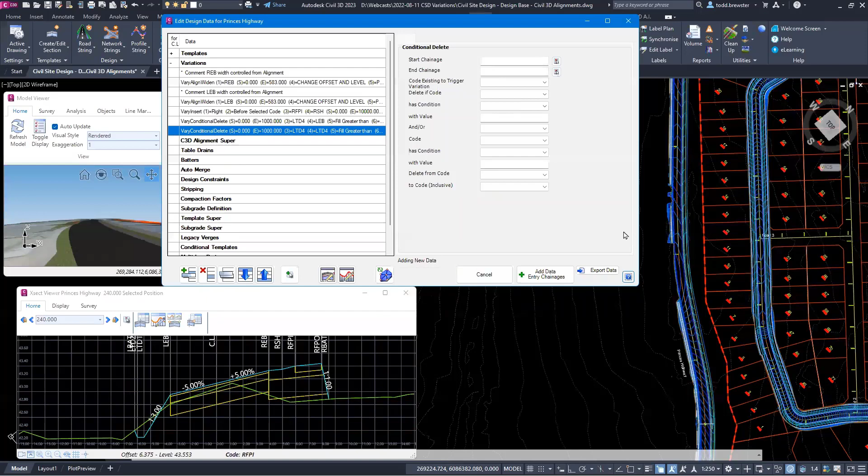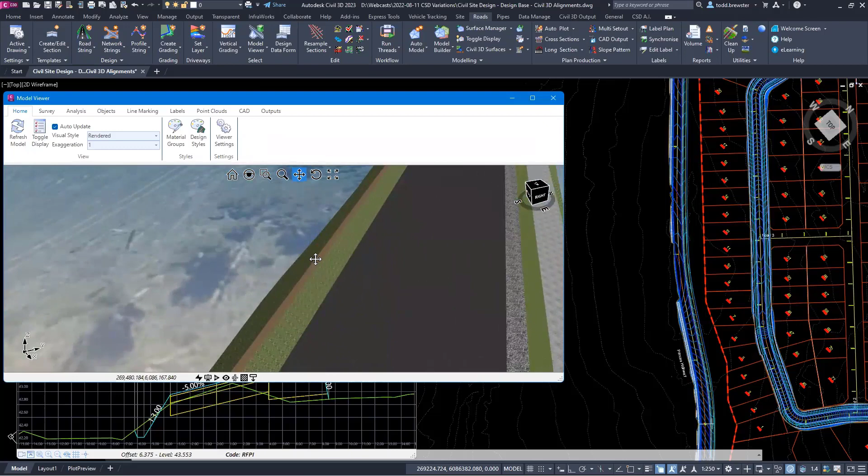If I rebuild my model, and make it big screen so you can see what happens — so benching when it's needed, no benching when it's not needed. You can use conditional delete to do semi-intelligent assessments of things in your cross-section.

All right, last one, and then I'm going to pass you over to Jonathan. So this one is copy codes.

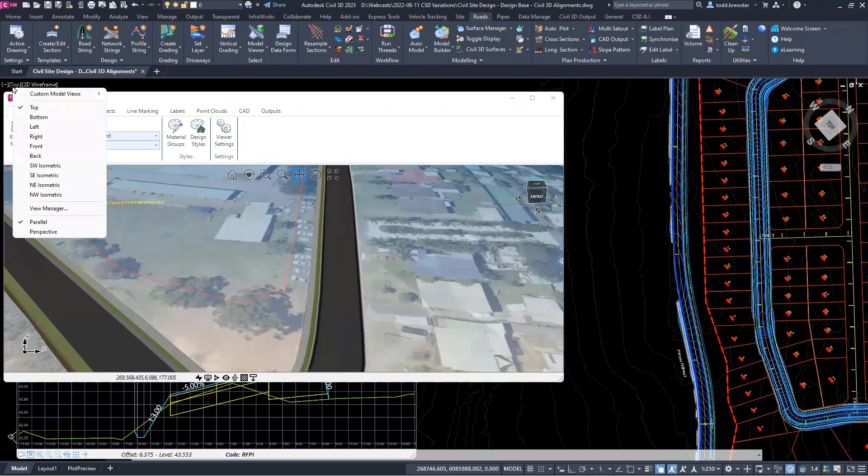What I've already got set up in my model is a string sitting over here — this alignment here to model the footpath. This ties in with some of Jonathan's comments earlier about a webcast we've done previously, where we showed different techniques on how to model these indented parking facilities.

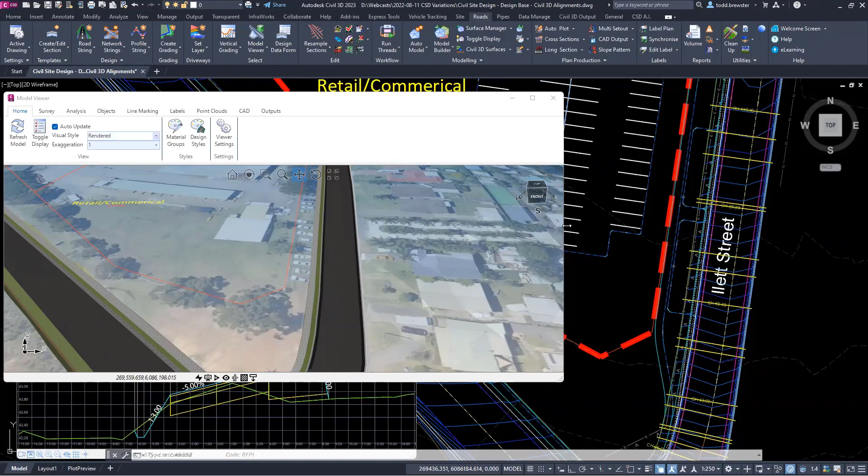Let's assume that they are going to happen in the future — maybe the developer of this particular commercial facility has been compelled to do that. But the footpath is being pushed out and around where they're going to happen in advance, so that we don't have to rebuild the footpath when we come to build the indented bays. So I've already modeled the string that represents the footpath — let me just turn it on to give you guys some context. So it's this one here.

Now, if I use just my alignment control to push the cross-section footpath in the model template for Ilett Street to follow this alignment that I've got for the string, it'll work great in a few spots, but the level control is limited to whatever I do in the horizontal alignment control, whether it's maintain the level or maintain the slope. That's the only options you get.

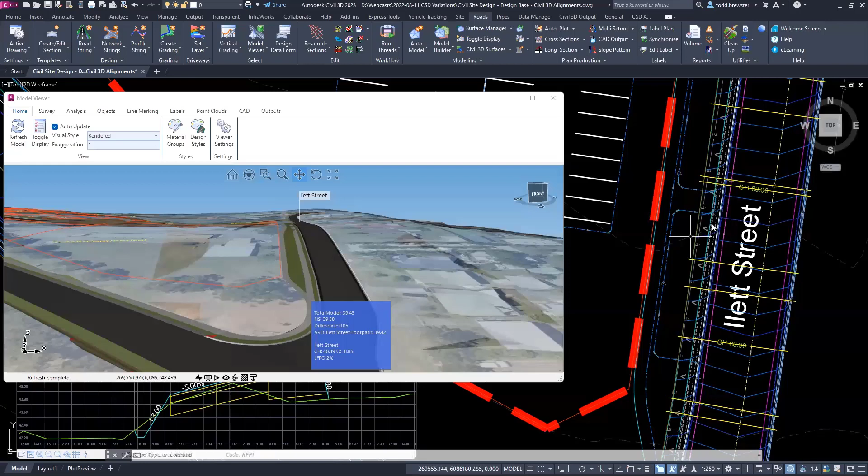When you want to do full string control, that's when you jump into strings. But to merge the two things together again, you actually use the copy codes. It allows you to merge one model into another. You tend to use it all the time for this type of stuff. The other thing that it really, really helps you with, and I just emphasize this one, and I will illustrate,

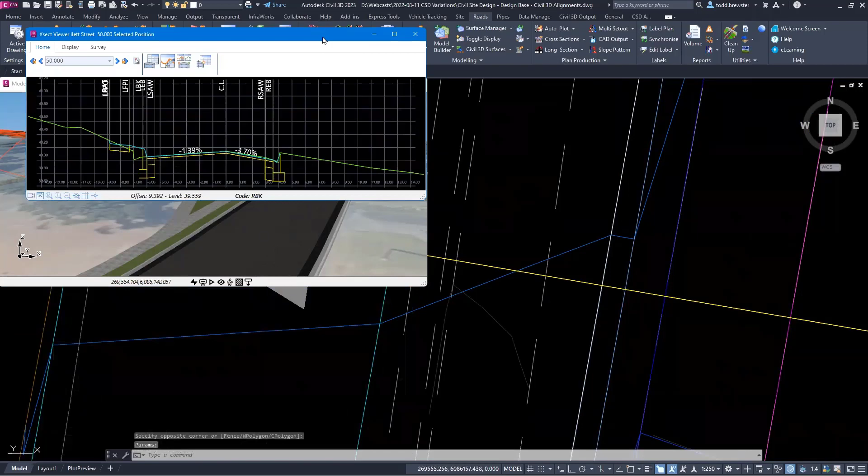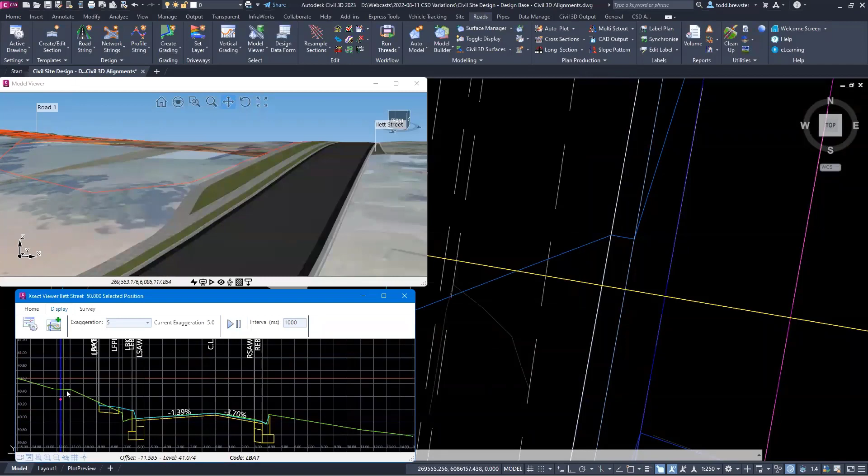when you actually look at a cross-section through here, so I'll bring it up on the screen right now, here. If I get the strings up, here we go. This cross-section, that one, Ilett Street. And to give it context, I'm actually going to go in and show you the pieces. So let's do it on all string level from Ilett Street footpath and alignment. So the blue line is the alignment position. The red dot is the level from the string.

So I have already graded, as I said, the string for the footpath over here. So just to show you what I actually did with that one, just so you can see that there is a design for it. It's just a string, setting some levels. I actually did use some design constraints to model the thing. So I basically did a calculation from, when it wakes up, here we go.

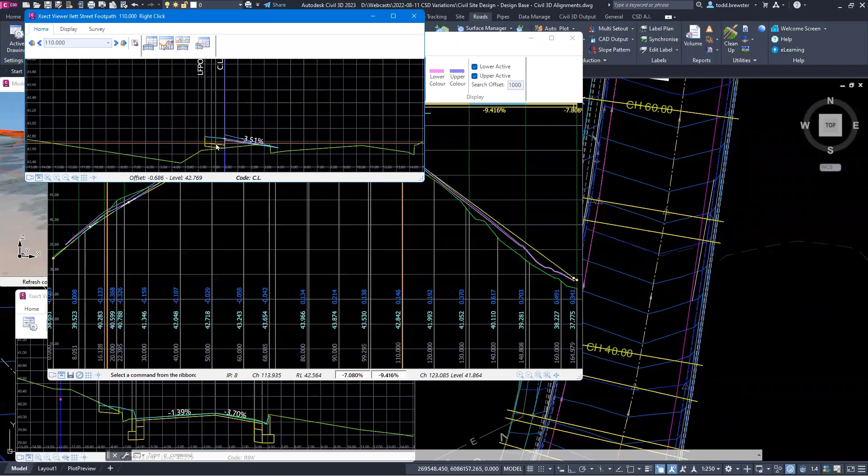From the back of curb, I projected back some grades here to give me some guidance on what to set the footpath to. And then I've set the footpath and I've applied a template in the footpath itself. So it's just a center line and a left footpath outer. Set the levels, I'm happy with it. That's what this string model is that I'm showing in the model view here. But I want this footpath to follow that one. So that's where I use copy code.

So from a data entry perspective, oops, that's a template entry. It is this one here, copy codes. I tell it the range. The other thing that's beautiful about this, it only applies where the string exists, so I can use the full length, doesn't matter. I pick the thing I want to suck information from. So this is the string I'm taking information from, Ilett Street footpath. I want to use full positions. I want to take full control of codes I nominate and push them across to pieces inside Ilett footpath.

And then I say in my current model, which is the road, I want the inner footpath on the left to follow the center line of the string from Ilett footpath, and then I want the LFPO to follow the LFPO. So I normally work these things so the strings all run in the same direction, and I use the same codes for the same things I want to match. So that'll make it easier. Basically, it's LFPO to LFPO, LFPI to the center line, which is my control piece.

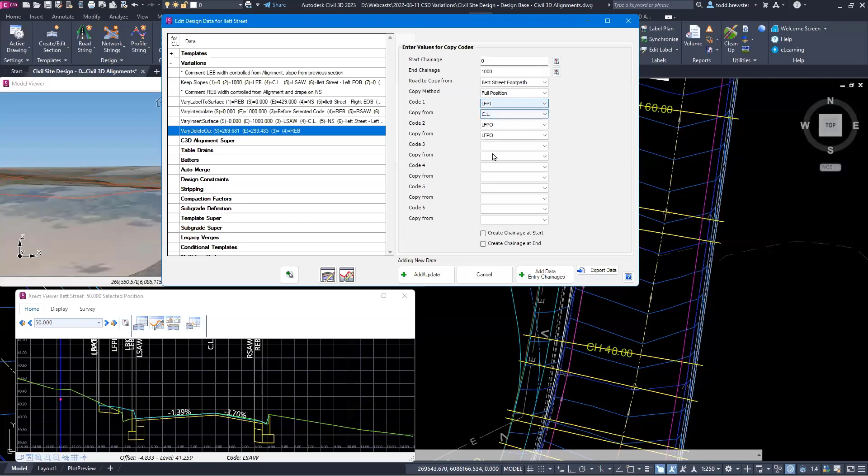And when I apply that, the software repositions this code, but this code as well. So that means the crossfall here is completely and utterly controlled by the string, which makes sense because if I'm looking at a section, where am I? I'm here. So the slice through this model is not my standard 2.5% or 2% or whatever the crossfall is on my footpath from my template. If I use just alignment control to control the inner to that point, then this position over here is 2.5 meters or 1.5 meters or whatever it is this way at 2%, which is not what happens in reality. The footpath's got its slope.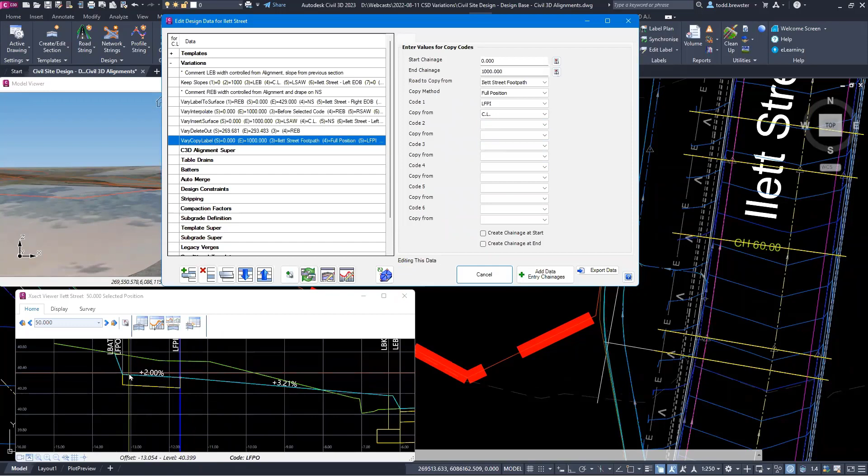You're slicing it at a non-perpendicular nature. And copy codes allows me to mimic that. If I actually undo part of that, I take out the LFPO and apply that, see how it jumps back, position shifts here, and the crossfall goes back to the template. So hopefully that illustrates why copy codes is actually really useful for merging things together.

So if you actually wanted to plot a cross-section with that footpath piece modeled based off the string, copy codes is actually the way you do it. So you go LFPO to LFPO, restore that, and then when you plot a cross-section, this thing here is fully controlled by the string. So if you make changes to this, this just updates, all stays together.